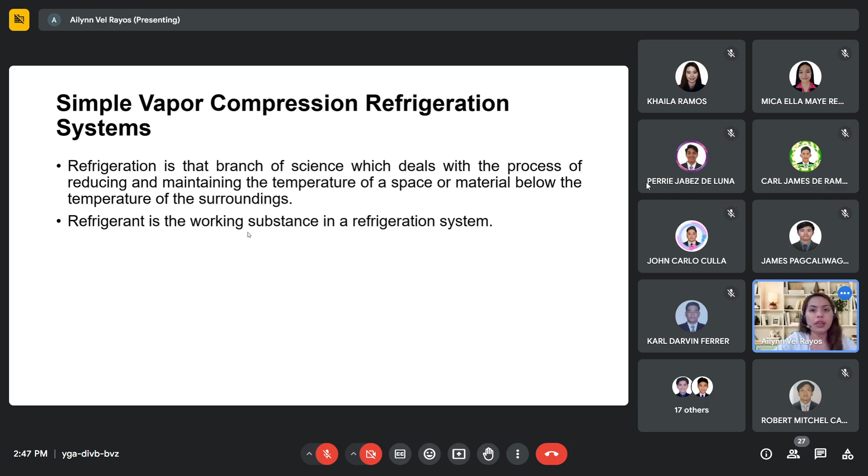As a review, the simple vapor compression refrigeration cycle is composed of four components: the evaporator, compressor, condenser, and the expansion valve. Here is its corresponding pH and TS diagram for the simple vapor compression refrigeration system.

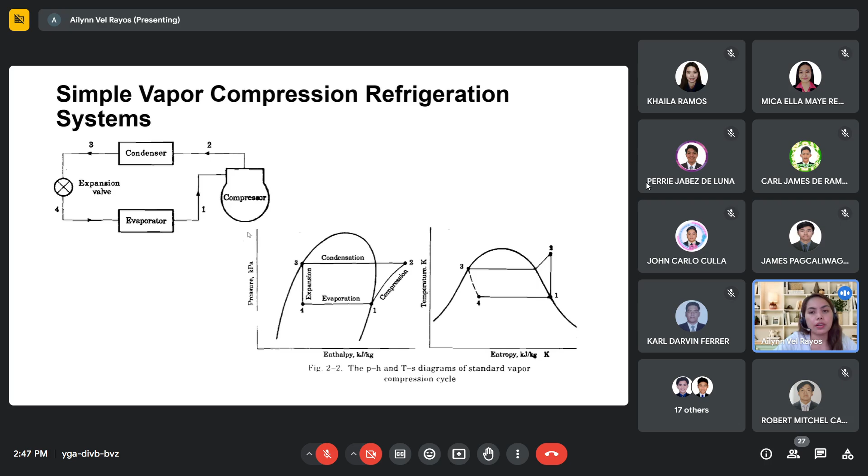So these are, again, a review of the processes involved in the simple vapor compression refrigeration system. These are the ideal processes. When we say ideal, meaning this is theoretical. If it is working in an actual refrigeration cycle, then there are actual values given, given the efficiency and pressure drops in the component. But when we say ideal compression cycle, we assume the processes involve the following.

Let us start with process 1 to 2. This one is in the compressor. Our refrigerant is saturated vapor, as you can see based on our pH and TS diagram. So the phase of the refrigerant before compression is saturated vapor, which is state point 1.

Let us review the different phases of pure substances. Here is the saturation line of the refrigerant in the pH diagram, and here is the TS diagram or saturation line in the TS diagram.

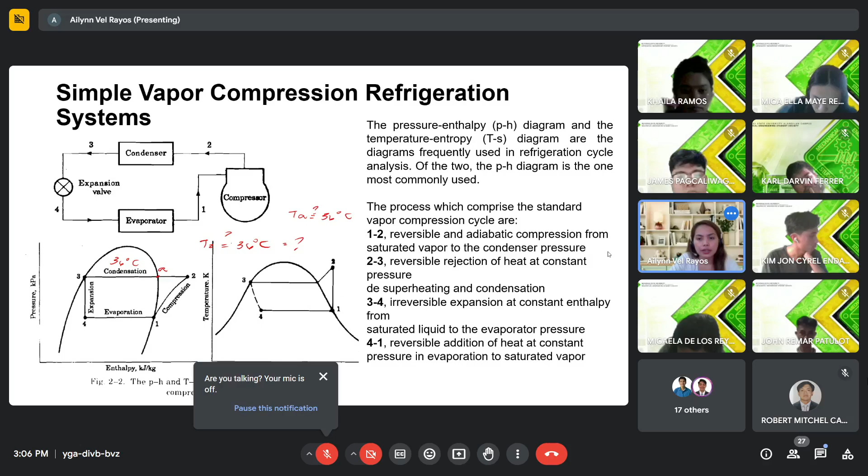So from that idea, you can now get values correctly on the table or chart. Okay? Do you have any question in this slide? May tanong ba? Okay, so let us move on to the next.

So this is the refrigeration cycle analysis. Work input in the compressor is mass flow rate multiplied by H2 minus H1. Okay, so our heat rejected in the condenser is mass flow rate multiplied by H2 minus H3. And we have isenthalpic process in the expansion valve where H3 is equal to H4.

And then heat added in our evaporator, which is equal to the mass flow rate multiplied by H1 minus H4. Okay, so this is the refrigeration cycle analysis. So take note that our COP again is QA or Q in over work of the compressor, or work input.

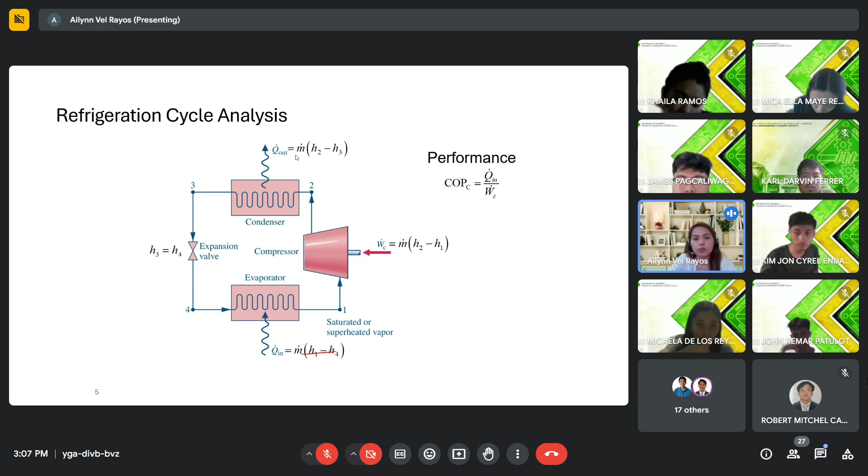Okay, so you can refer on the uploaded lecture in the Google Classroom if hindi nasundan yung iba. Okay, so for the volume displacement, take note that volume displacement rate of compressor, diameter of cylinder bore D, L is the length of the stroke.

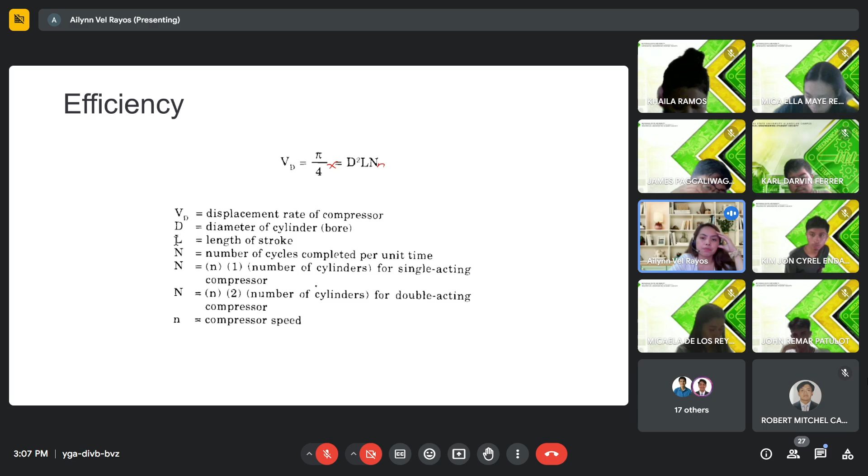Take note na yung equal dito is multiplied yon, and then we have to multiply another small n for the compressor speed. So capital letter N is the number of cycles completed per unit time, number of cylinders for single acting, and 2 is the number of cylinders for double acting compressor.

Okay, so single acting compressor makes one complete cycle in one revolution, and a double acting compressor makes two complete cycles in one revolution. For the actual volumetric efficiency, or eta sub VA, this one is volume flow rate entering compressor divided by the displacement rate of compressor.

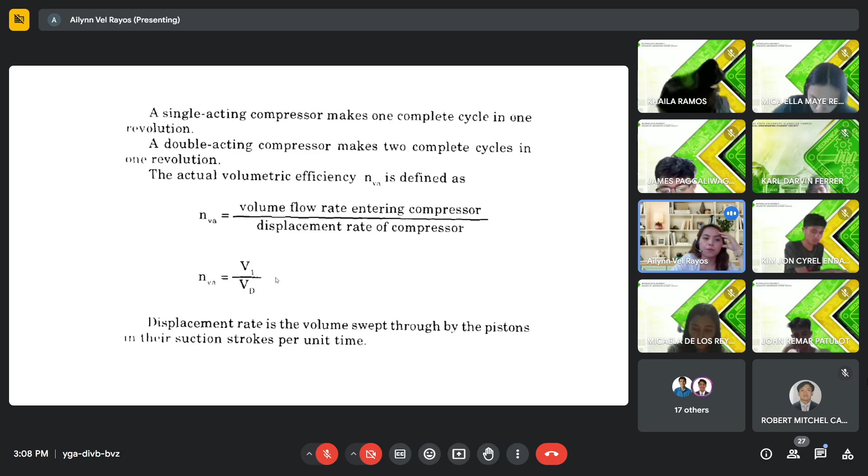Okay, and then the actual volumetric efficiency is equal to V sub 1 over VD. Kaya normally kinukuha natin state point 1 before going into the compressor, kinukuha din natin yung volumetric volume flow rate, or yung V sub 1 na value on the table kasi siya saturated vapor kapag ideal. Okay?

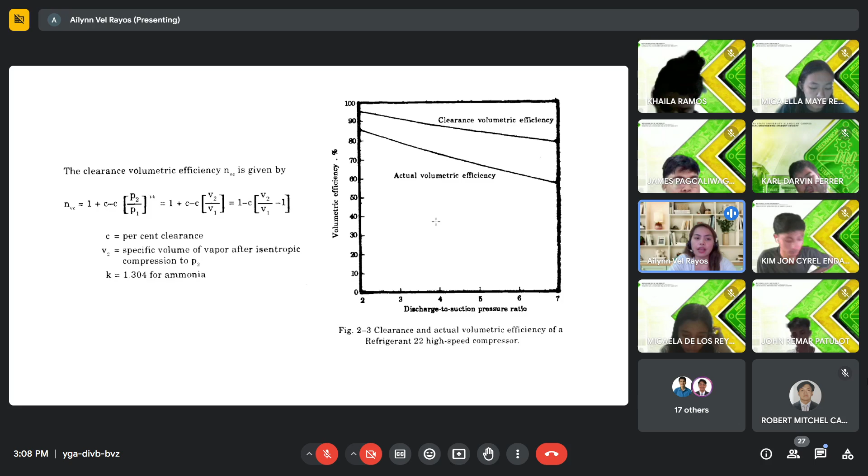So, in order for us to get the volumetric efficiency using the clearance volume, that is 1 plus C minus C multiplied by the quantity P2 over P1 raised to 1 over K. And K for ammonia is 1.304.

For the adiabatic compression efficiency, this is the isentropic work of compression or the ideal work of compression divided by the actual work of compression. We're going to deal with this when we are in the actual vapor compression cycle.

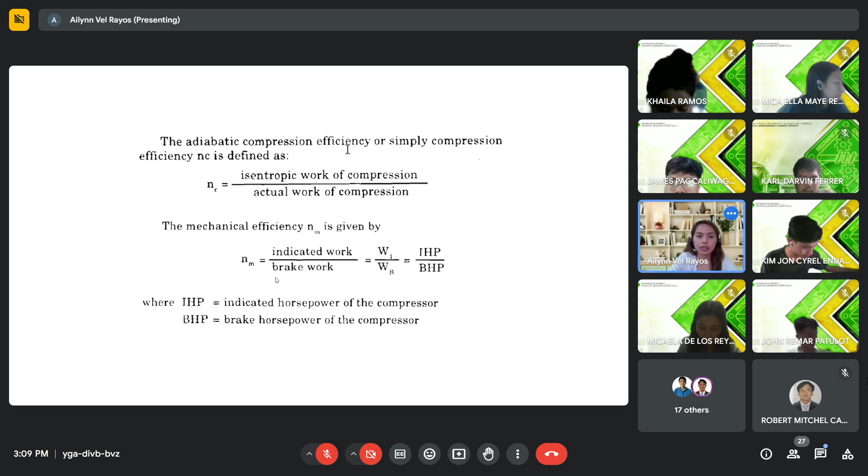The mechanical efficiency is given by indicated work divided by brake work, which is equal to indicated horsepower, if it is in horsepower unit, divided by the brake horsepower.

Okay, so this is our sample problem. Can you please read this, Micaela?

A standard vapor compression cycle developing 100 kilowatts of refrigeration using ammonia refrigerant operates with a condensing temperature of 36 degrees Celsius and an evaporating temperature of negative 20 degrees Celsius. Calculate: A. Refrigerating effect in kilojoule per kilogram. B. The circulation rate of refrigerant in kilogram per second. C. The power required by the compressor in kilowatts. D. The coefficient of performance. E. The volume flow rate measured at the compressor suction in liter per second.

F. The power per kilowatt of refrigeration. G. The compressor discharge temperature.

Okay, first you have to get all the values here. For each state point, one, you have to get the enthalpy, specific volume, entropy. For state point two, you have to get the enthalpy and entropy. And then for three and four, you have to get the enthalpy.

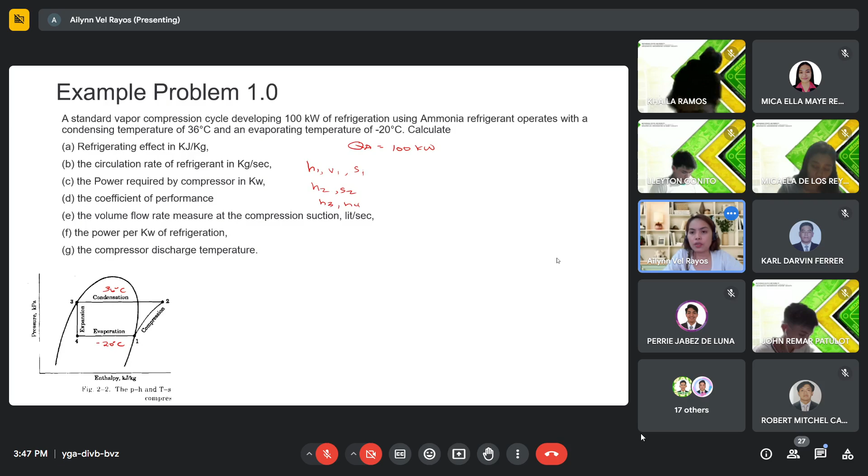So for H2, that is correct, 1738. But let me share this screen. As you can see, the entropy line is actually not a straight line, it's a curve. But what we base it on here is S1 equal to S2, which is 5.9025. So if we look at it, it's a bit lower. And the same with this pressure, 1391 point something, it went down a bit from 14 because the interval here is 200. So you need to analyze the part to get that 1391. And then what we get is 1738.

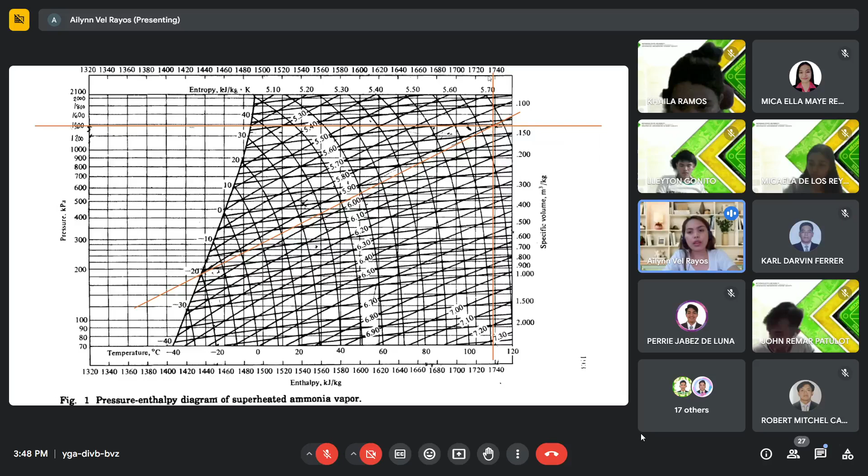Okay, so you can do example problem number 2 and then try to get the values on your own. Getting the value is one of the most crucial parts in solving the problem. Because once you identify a wrong value and substitute it into the formula, many things will become wrong.

So the answer for this temperature is 124. Lleyton, can you please share your answer in the group chat? Okay, so others can see it too.